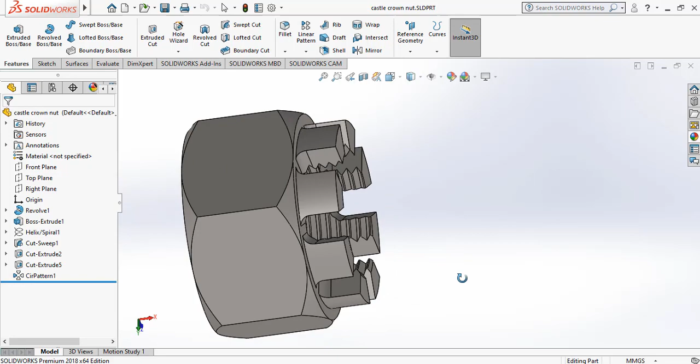You can see on your screen a castle crown nut. Today we learn how to make a castle crown nut. This is a very simple, easy and beautiful tutorial. Here you learn how to make a castle crown nut, how we can make threads, internal threads and these flanges.

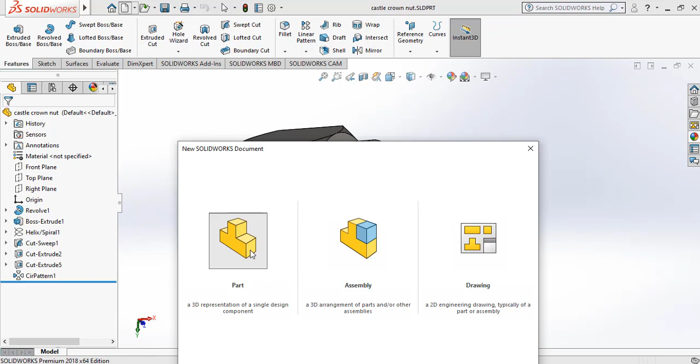Let's start to create this castle crown nut. Open up your new file, part here. Select front plane and go to sketch.

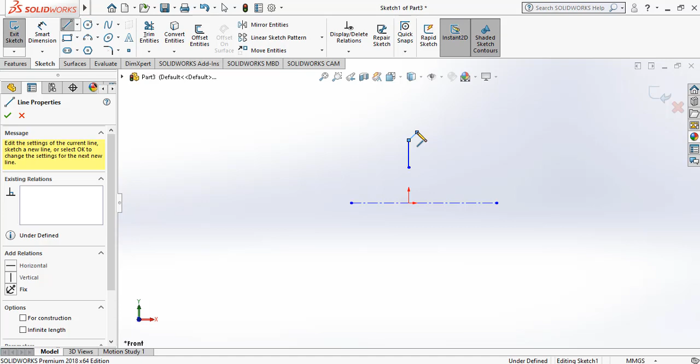Select a simple center line. Draw a center line passing through its origin. Now select line: a vertical line, a line at any angle, a horizontal line, a line at angle, a vertical line, a horizontal line, and my last and first point.

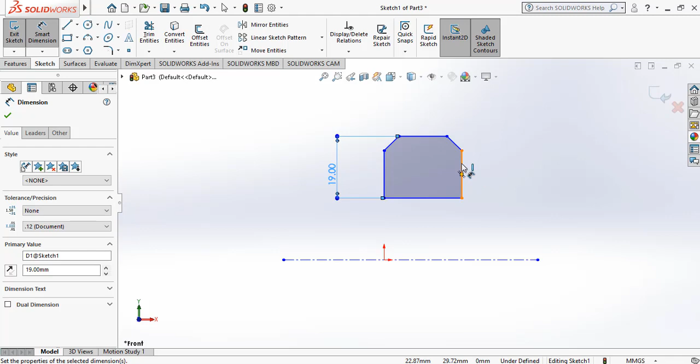Select dimension tool, now give it dimension from this line to this line. It should be 19mm. Length from here to here is 34mm.

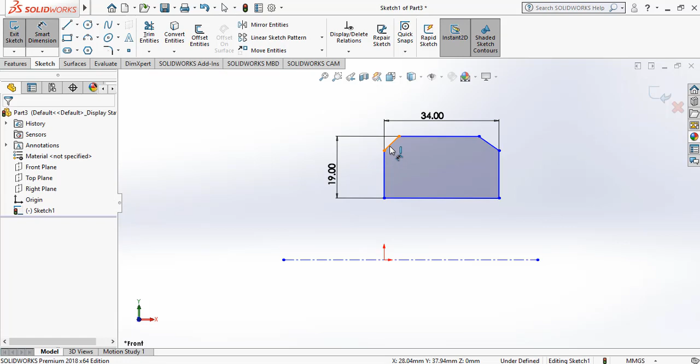Select this line and this line and give it angle 45 degrees. Select this line, 45, it's exactly right. Again select this line and this line, give it angle 45 degrees. Select this line and make it horizontal, this also will be horizontal.

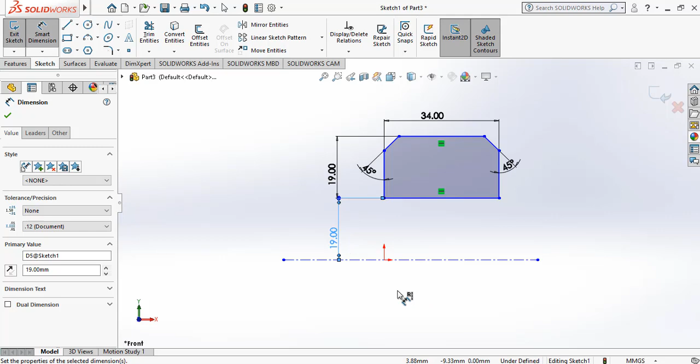Again go to the dimensioning tool, select this line and this line. Distance between this line should also be 19mm. One more thing, this line, shift key, this point, coincident. Our simple sketch is ready.

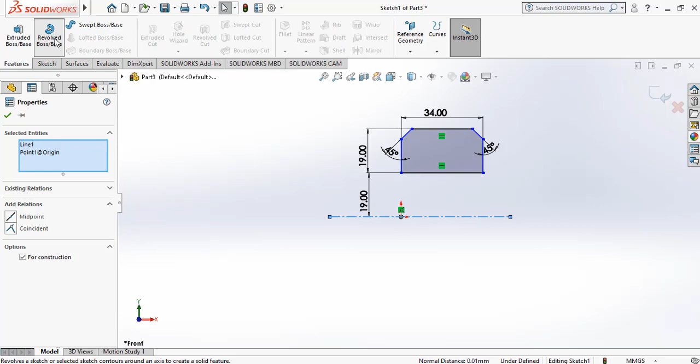Now go to features, revolved boss base. Here you can see a simple nut ready for the castle crown nut.

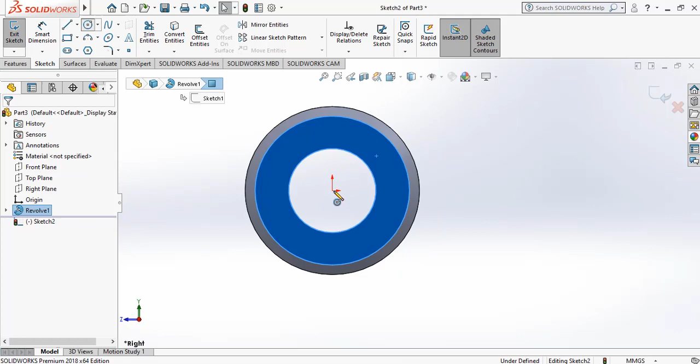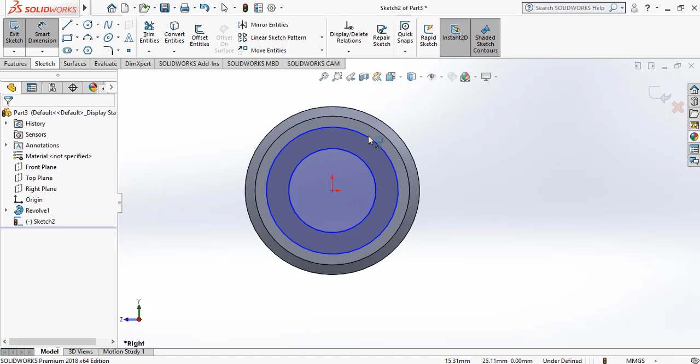Select this face and go to sketch, x-axis, select a circle and from center point to here, again go to center point and select this. Again select this from this point to this line. Go to dimension tool and give it dimension, outer side diameter is 57mm.

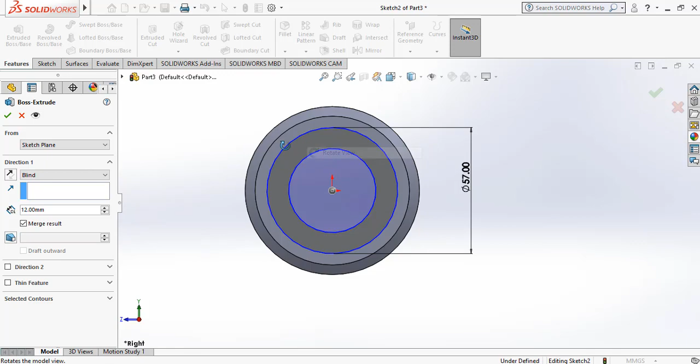It's almost right. Go to features and extrude boss base. Select the command extrude boss base, give it dimension 12mm, and now we'll see at simple rotate view. Now you can see this inside hollow. Select OK.

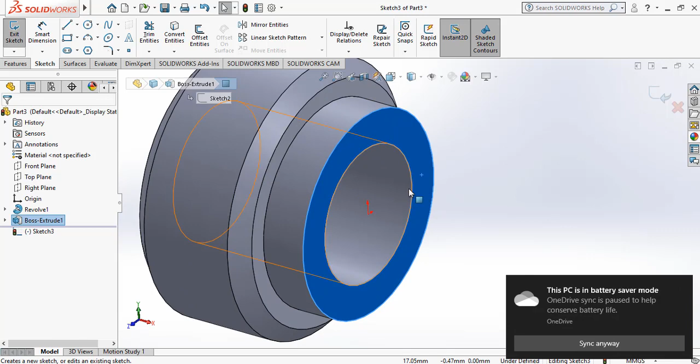It's almost ready. Now select this face and sketch, select this internal line, and here convert entities. Go to the features and here curve and line, helix and spiral.

Here 3mm, reverse direction, 22mm, 22 revolutions.

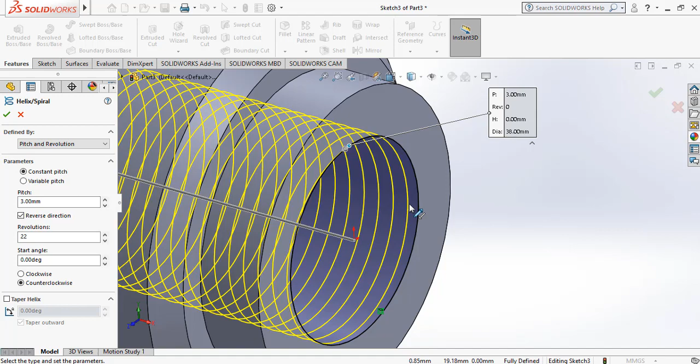Go select this, and now here go to front plane, sketch, simply z-axis, and here select line, draw horizontal line. Simply draw a rectangle.

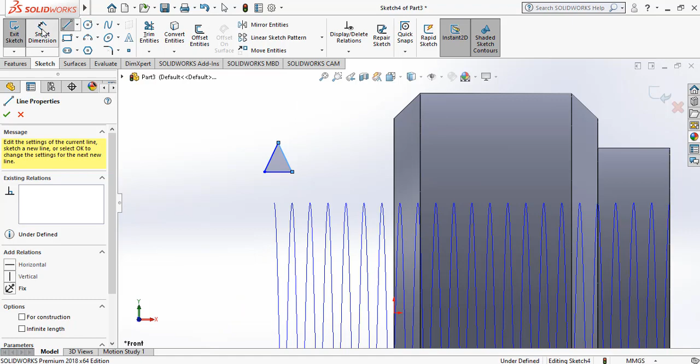Go to dimensioning tool, as always, for dimension, for define object. This is 4.5mm, this is 4.5mm, and angle from here to here is 60. Select this center and shift key this center of this line, this should be horizontal. It's right. Now again select this line and make it horizontal.

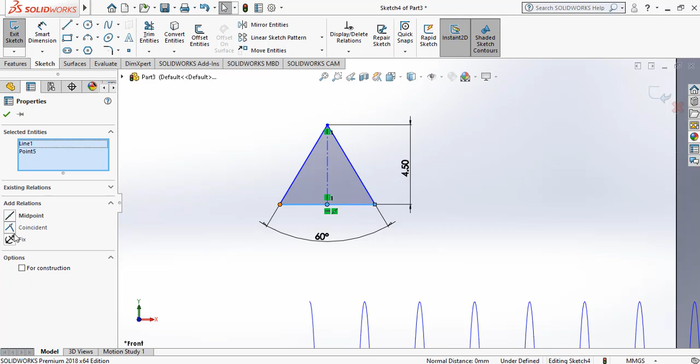Again go here, line, select a center line, draw a center line from here to this point. Select this point, shift key, select this line and make it coincident. Now find out this center, this line, center point, and shift key, select this helix, make it pierce.

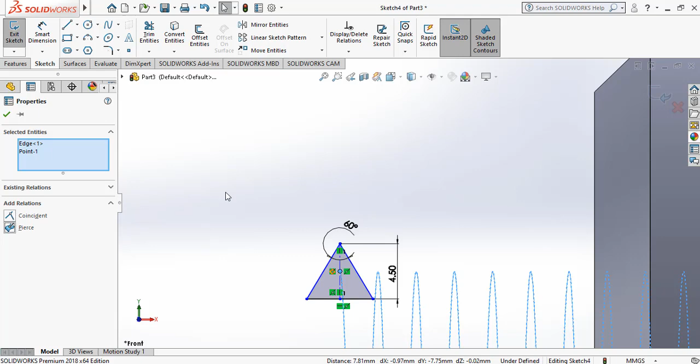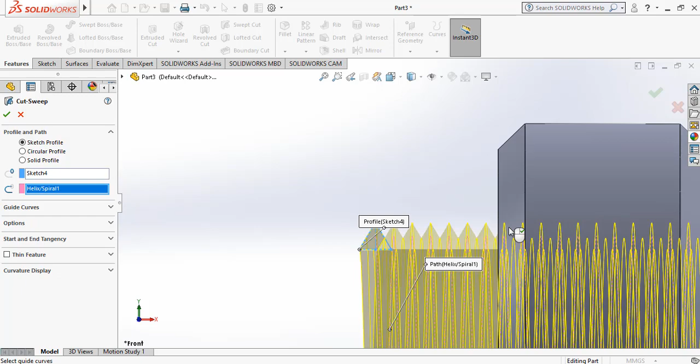Now simply go to exit. Now features, here swept cut, you can see a command swept cut, select swept cut command. Here sketch 4 already selected. Now at the second path here select this helix. You can see our simple thread is ready, created here.

Now go to helix and hide this one. Show.

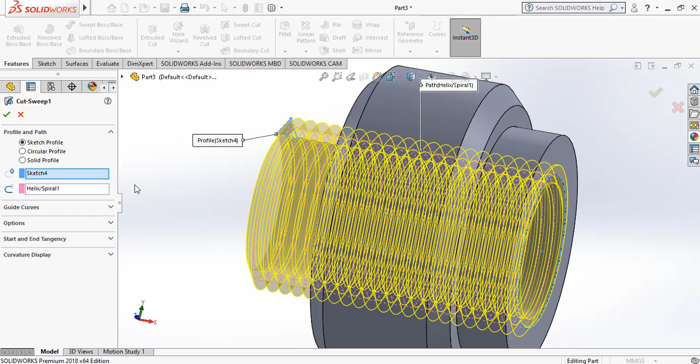I think we have some problems here. Edit, go to the edit. It's all right. Now solve, and go to here, it's hide. Everything is right, clear.

Revolve view. You can see here threads is created. Here now

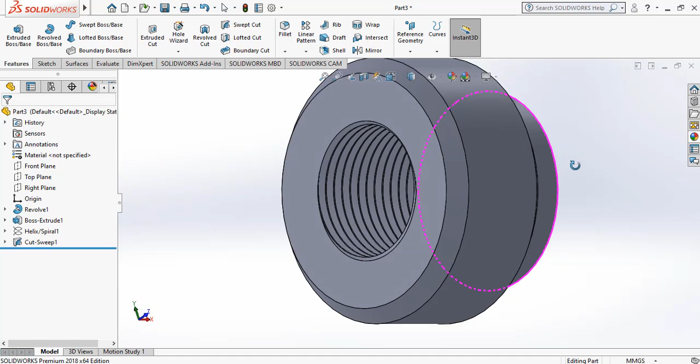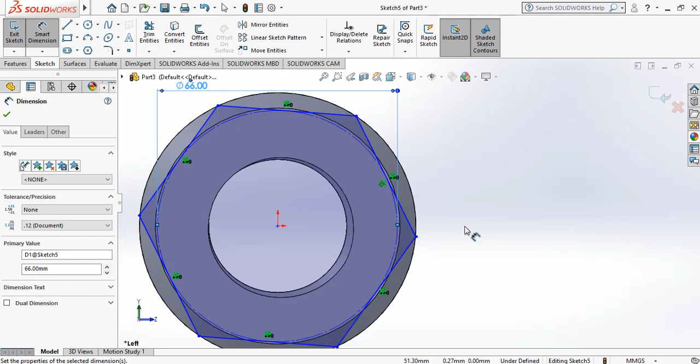Go to this face and sketch command. X-axis and this side view, select a polygon here, draw a polygon and this point. Dimensioning tool, give it dimension 66mm. Just a minute. Go at this center, select this center point and select this, make coincident.

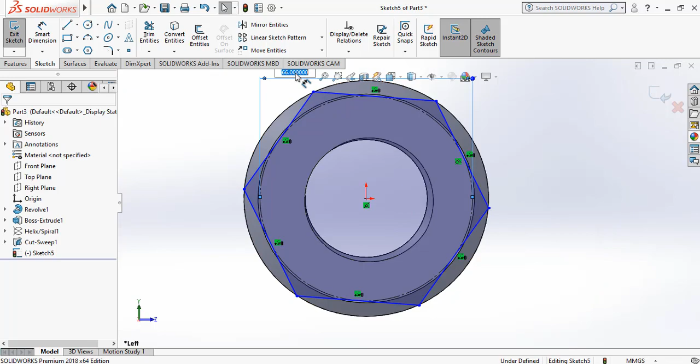Now give it dimension 67. Here it's all right.

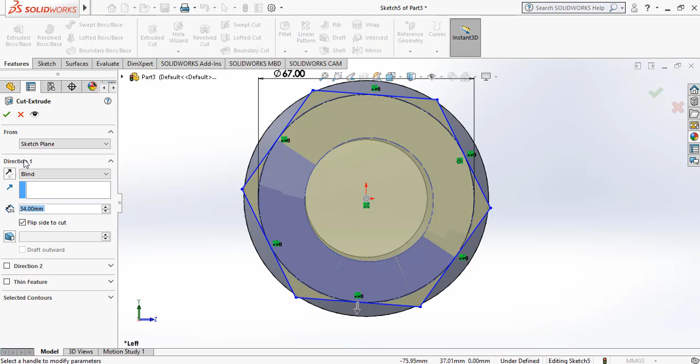Go to features, extrude cut, not extrude boss base, extrude cut command, and select here, flip side to cut here. It should be 32mm or 34mm. Select OK command.

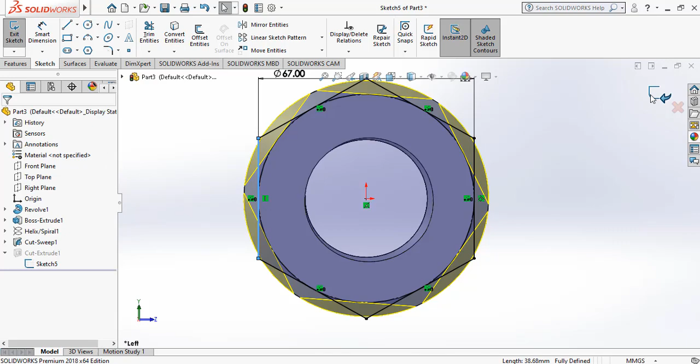Just go again here, edit sketch. It's all right, not any fault, but go here this line and make it vertical. I think this is okay. Here rotate view, you can see here.

Now the last thing, select again our front plane sketch, normal to. Here go again center line, find a center point here and draw center line.

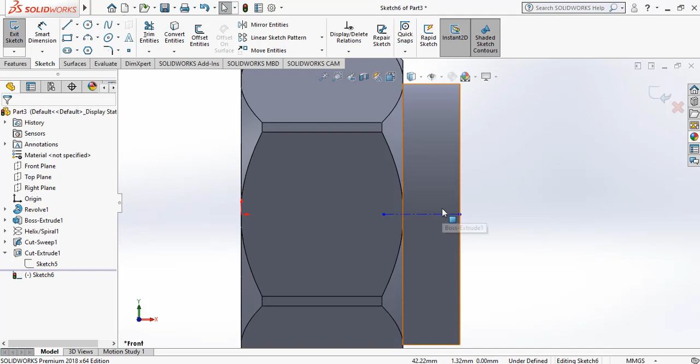Sorry for the brightness, because of going battery, so I took down the brightness.

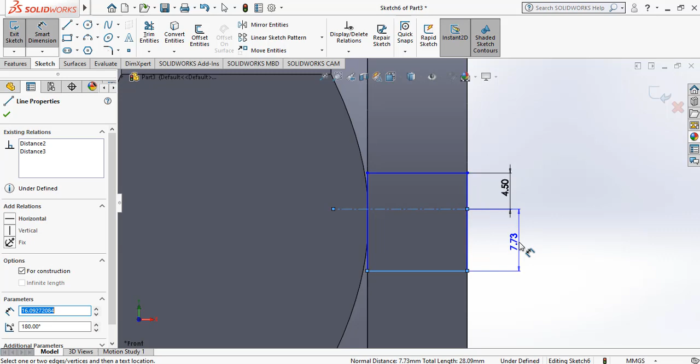Now go here, corner rectangle, draw rectangle, start here to end this point, give it dimension from here to this line should be 4.5, and this line to this line it's also 4.5. It means totally it's 9mm.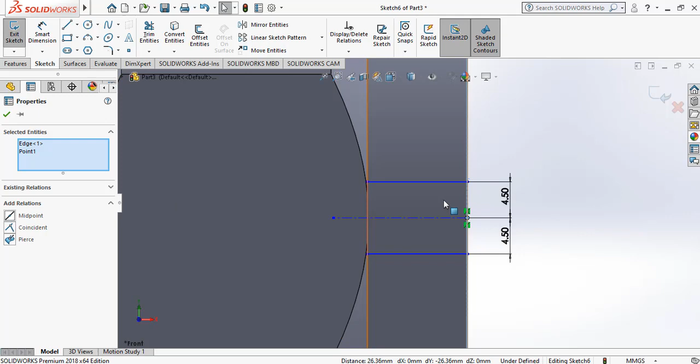Now select this line, select this line, shift key, select this point, make it coincident. Again go here, select this point and select this line, make midpoint. Select this line, make it horizontal, and same horizontal.

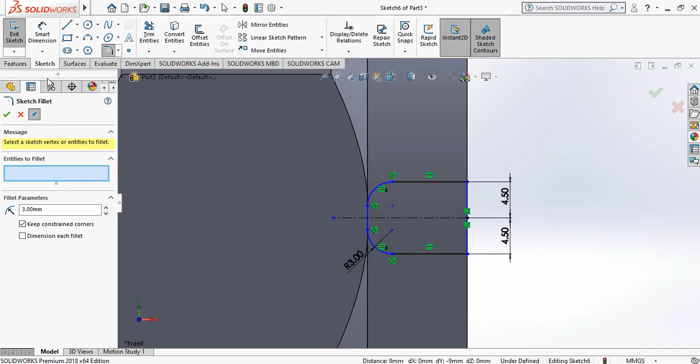Go to this sketch fillet, 3mm, put it 3mm here and select this, also select this one and OK. Go features, just a minute, go here to features. Go features, extrude cut, here it's right.

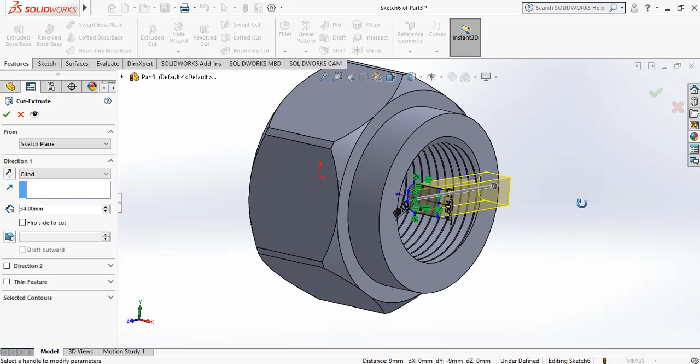It's cut. Now go here, linear pattern, select circular pattern. Select this cut, extrude cut. And now 360 degrees, 8 equal spacing, go here and select this line.

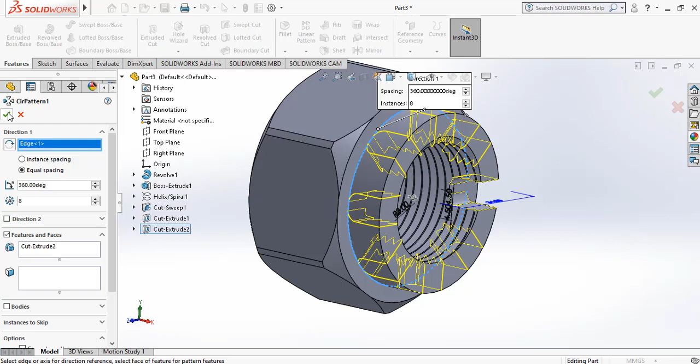Now our simple castle crown nut is ready. You can see it's looking beautiful, it's simple. Last thing, add material, add steel. Simple steel.